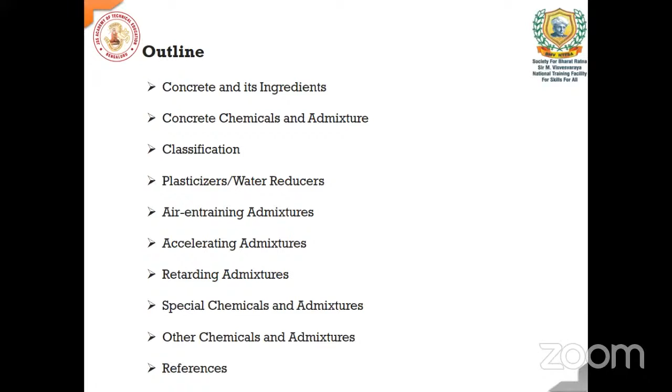Today I'll be giving a lecture on the role of concrete chemicals and admixtures in construction. This is the outline of my presentation. We'll be discussing concrete and its ingredients, concrete chemicals, admixtures, classification of the chemicals and admixtures used in concrete, plasticizers or water reducers, air entraining admixtures, accelerating admixtures, retarders, special chemicals and admixtures, and other chemicals. Because the family of chemicals used in concrete is very vast, I'll be touching only the important ones which we use very frequently in construction: plasticizers, air entraining agents, accelerators, retarders, and some special chemicals as well as other chemicals. And ultimately, my references.

We all know that concrete is the most consumed material next to water throughout the world.

We are consuming some millions of cubic meters of concrete every year, and it is because of its easiness in preparation and construction. Day to day, its consumption is increasing. We know that it's a composite material consisting of cement, aggregates, both fine and coarse aggregate, water, and we need to add admixtures whenever we want some specific performances.

Late in the 1960s and 1970s, we started using fibers in the concrete. The fibers itself is a very big domain. We have different types of fiber for different applications, and also to achieve a very dense structure of the concrete, we are using supplementary cementitious materials. We also call them mineral admixtures: fly ash, GGBS, silica fume, microsilica, lime powder, metakaolin, diatomaceous earth. There is a variety of supplementary cementitious materials used in concrete.

To understand in a very simple way, concrete is a composite material in which, in general, 10% of the volume is occupied by cement, 20% air and water, 30% sand or fine aggregate, and 40% gravel or coarse aggregate. This is the generalized composition of concrete.

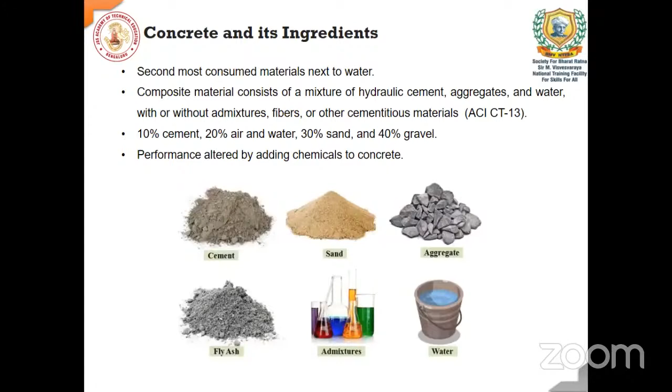Now chemicals have become an integral part of concrete. Earlier, it was an optional part. Now it has become an integral part of the concrete. The expectation from concrete is increasing day by day. So the next one is: what are concrete chemicals and admixtures?

ACI 212.3 clearly defines chemicals or admixtures as materials other than water, aggregate, cement, and fiber reinforcement used as an ingredient of concrete or mortar and added to the batch immediately before or during its mixing. Now we have two different terms, additives as well as admixtures.

The word additive refers to whatever chemicals or ingredients we add during the production of cement in the cement factory. It can be calcium sulfate to avoid the fast setting. Even nowadays, to produce PSC or PPC, Portland Pozzolana cement or Portland slag cement, we add GGBS or fly ash during the clinker grinding. Those are called additives.

If I want to call a particular substance an admixture, it has to be added to the concrete during its production, before or during the mixing. Most contemporary admixtures or chemicals are available in liquid form. When we started using admixtures, they were in powder form. Slowly, because of convenience, we shifted from powder to liquid form. Now it is completely liquid and all are water soluble, synchronized with the water for better performance.

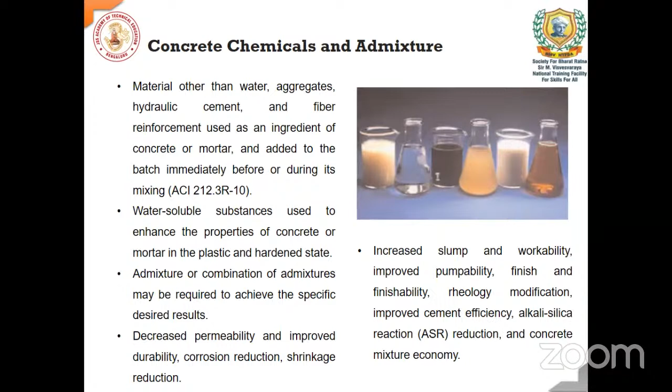See, these are all the different performance or expectations from the concrete. To achieve this performance or the expectation, we'll be using more than one admixture in contemporary concrete production. Now, before going for the discussion on the concrete, we should know the classifications as per the different codes. What are the different chemical admixtures or the chemicals available to be used in the concrete?

So as per ACI 212.3R, it has classified from type A to type G. ACI is well advanced; it accepts the field data very quickly. As far as IS is concerned, ACI will accept the field data, the field feedback, very quickly. So you can see here type A is simply water reducing admixture, B is retarding, C accelerating. Now they start mixing two or more admixtures together. From D to G, it is water reducing plus retarding, water reducing plus accelerating.

There is no conflict of the performance. Water reducing itself is a different requirement. Acceleration is a different requirement. So wherever we don't have such complications or conflict, we can continue to mix the two admixtures. Then F is water reducing and HRWR, we are calling it the high range water reducers. Then type G is water reducing, also high range, and retarding. High range means it will reduce the water content by 30 to 40%. This is the classification as far as ACI is concerned.

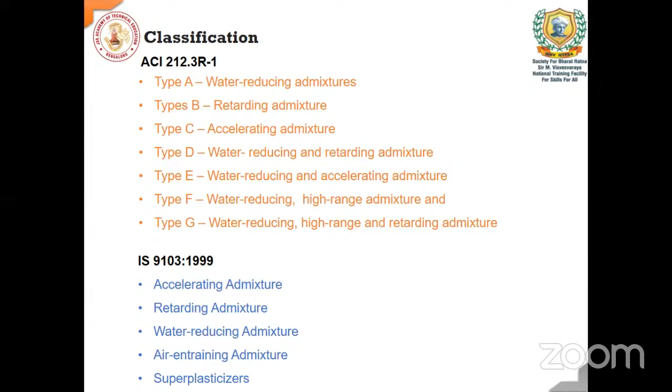Then we have our own IS 9103. They have a very simple classification: accelerating admixtures, retarders, water reducers, air entraining admixtures, super plasticizers. Very important, we have one more standard, Portland Cement Association, that is PCA EB001. This has covered almost all types of admixtures available in the industry. It starts from air entraining agents to damp proofing, bonding, gas forming, anti-washout. It includes all the different types of chemicals which are used in the concrete

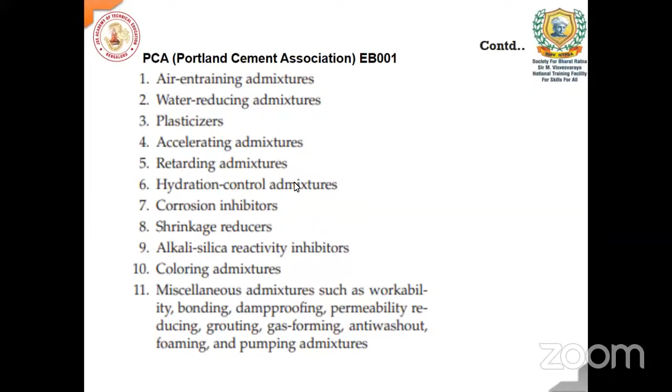throughout the world. So we can see here corrosion inhibitors are also added, shrinkage reducers are also added, hydration control admixtures are also added. We should not confuse the retarding admixture and the hydration control; both have different functions. This is as per again PCA EB001. It has the type of the admixture, what is the desired effect, and what chemicals are used. So, for example, coloring admixtures, we need to provide the color. It's carbon black, iron oxide.

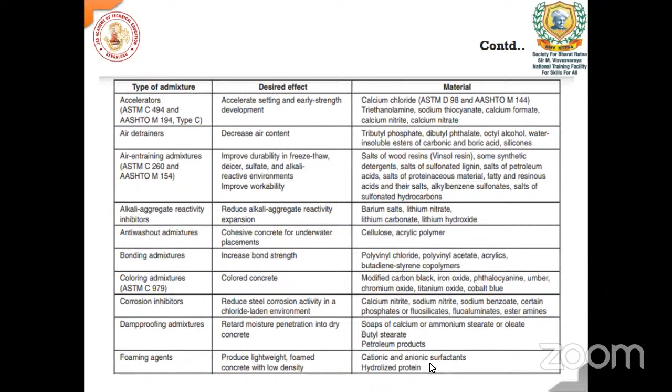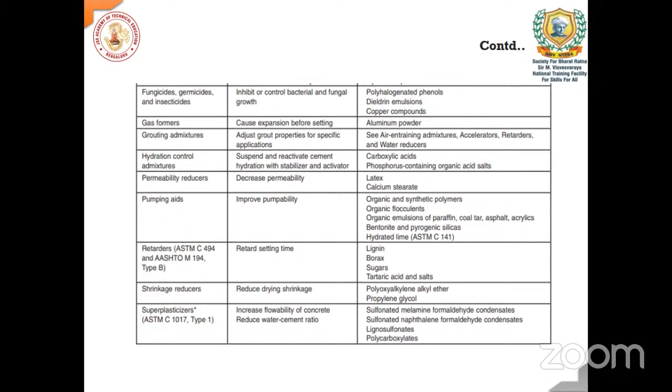Then we have pumping aids, again chemicals. Like this, for a different expectation or a different requirement, we are using different chemicals or admixtures. This is clearly included in the PCA, Portland Cement Association EB001 standard. Again, we have super plasticizer.

Yes, sir. I request all the participants to mute. Actually, somebody has... Sanath, don't admit. They can use the YouTube. No, sir. By mistake, it was opened. I think it has closed now. Oh. So shall I continue, sir? Yes, sir. Okay, please go ahead. Please go ahead. Okay, sir.

Again, we have the water reducer itself. Water reducer and plasticizer are almost the same. We have different varieties of water reducers. It all depends on how much water we want to be reduced in the concrete. We are calling it the free water. For example, per cubic meter, if you are adding 160 kg of water, how much do I need to curtail? Because we know that less water means more strength. So that is why super plasticizers or plasticizers play a very big role in achieving the required strength. These are the classifications based on the amount of reduction.

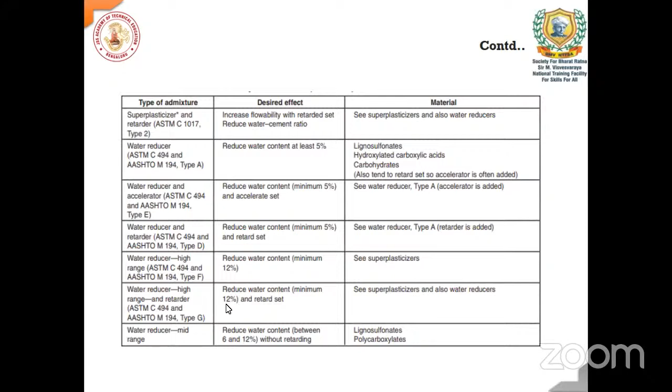For example, we are having water reducers and accelerators. So we can see here there is an improvement up to 12%. That was very old. Now we are in the stage wherein we can easily achieve up to 30% reduction in the free water. Next, I will go in detail about how the plasticizers or water reducers influence concrete performance, both in the fresh as well as the hardened state.

The plasticizers, again, we are going to categorize based on their influence on water reduction. For example, a normal water reducer is somewhere between 5 to 8% free water reduction. If I say high range, now we can easily go up to 30% reduction. Now, how exactly are these water reducers chemically playing their role in the concrete?

We know that cement or whatever supplementary cementitious material we are using is very fine, with particle size at the level of microns. So as soon as we mix the water with the cementitious material, it will flocculate, meaning the particles attach to each other. Because water is negatively charged and cement particles are positively charged, they attract each other. So the water will be arrested or entrapped between the cement particles.

Now by adding water reducers, whether normal, mid-range or high range, the main function is to impart a charge to the cement particles so that they repel each other. Because of this repulsion, the entrapped water between the cement particles will be released. Say we have added 160 or 165 kg of water per cubic meter, and assume 10 liters of water is entrapped between the cement particles. By adding water reducers, we get that 10 kg of water for hydration.

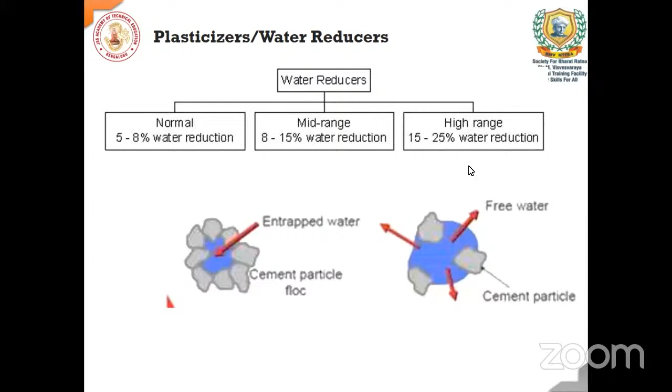Next, what are the different materials used as water reducers? It can be as basic as lignosulfonic acid, the mid one is hydroxylated carboxylic acid, and the current superplasticizer we are using is polycarboxylate ether. Whenever we discuss superplasticizer, it should contain polycarboxylate ether. These are some other chemicals which can be used as water reducers, such as sugar acid. These are organic compounds which reduce the requirement of water.

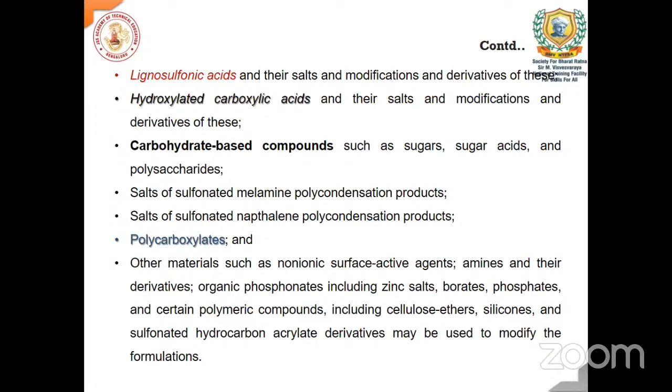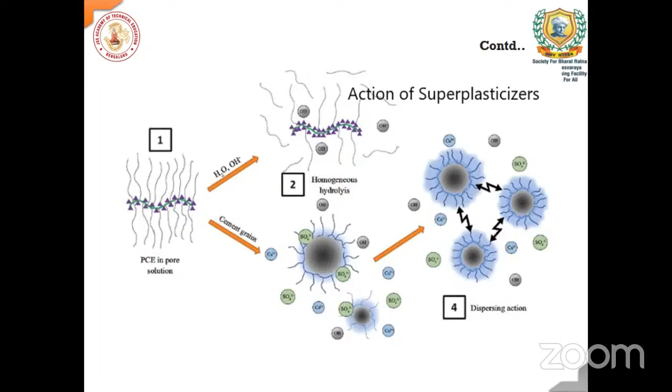In the action of superplasticizer, the plasticizer will release the entrapped water, but the superplasticizer, to one more extent, will repel the cement particles, so that across the entire concrete matrix the cement particles are readily available throughout the concrete. They are dispersed. Once the cement particles are available, we can assure maximum or 100% hydration. Plasticizers just release the water. Superplasticizers, in addition to releasing the water, disperse the cement particles.

Next, what is the effect of plasticizer in general? To some extent, it will also entrain some air in the concrete. It will reduce the water content; this is the basic expectation of the plasticizer. It improves the finishing characteristics and strength. Because of the reduction in water content, the strength will increase. Shrinkage and creep, both plastic shrinkage and drying shrinkage, which are ultimately due to volumetric changes, will reduce. But we can't always expect positive effects of the plasticizer. Sometimes we also have negative effects.

So as all the waters are released because of the repulsive action of the water as well as the cement particles, we may witness bleeding. Bleeding means the water may come out from the other material. So we may expect some enhancement in the bleeding, and also because of the usage of the water reducers, we may also witness quick loss.

So we expect the workability should last for 30 minutes or 45 minutes. We may lose the workability a little early. These are all the other effects of the super plasticizers or the plasticizers.

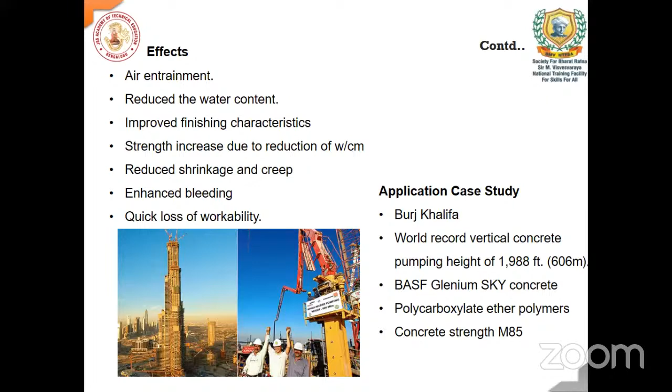Nowadays, whenever we want more retention of the concrete, and whenever we are going for high strength concrete, more than M50, the usage of the super plasticizer is inevitable. And whenever we are using supplementary cementitious material like ultra fine GGBS or silica fume, there must be a super plasticizer, which will ensure the availability of the supplementary cementitious material as well as the cement throughout the concrete matrix. Because ultimately we need to achieve the strength of the concrete, and in the meantime, it should be pumpable, or it should have a very good slump retention.

The next very important one is air entraining admixtures or air entraining agents. We have some peculiar problems like freezing and thawing. Freezing and thawing is a very peculiar problem we may not experience, but it happens in the polar countries.

Sir, give me 1 minute. I'll be back in 1 minute. 1 minute only.

Yeah, in the previous slide, Dr. Shasikumar explained with respect to Burj Khalifa. I'm very happy to share that one of my BE classmates, Dr. Rajendra Prasad, was the quality control in charge of Burj Khalifa, and he was there till completion of the project. And now he has shifted to Saudi Arabia.

Yesterday in the Times of India paper, many of you have seen the structure taller than Burj Khalifa. It is coming up; almost 1/3 or 2/3 of the work is over in Saudi Arabia. The Kingdom Tower in Jeddah. He was my classmate, he is from Tumkur. That is because a lot of infrastructure works are going on with a lot of these admixtures. Now I request Shasikumar to take over.

No issue. As the professor mentioned, the structure is the Kingdom Tower. It's in Saudi Arabia, the place is Jeddah, and the height of the building is 1.1 kilometer. The Burj Khalifa was 828 meters. Now the Kingdom Tower is 1.1 kilometer. It is not yet completed; once it is completed it will overtake the Burj Khalifa. In such projects, usage of the super plasticizer or construction chemicals is inevitable.

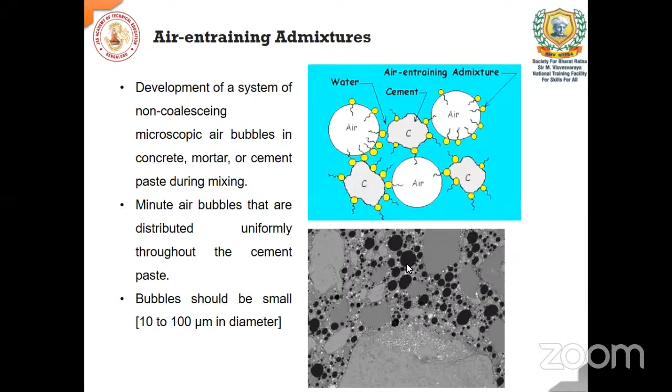Their size is around 10 to 100 micrometers in diameter. We can see here a scanning electron microscope figure. The black indicates the air entrained artificially because of the admixture. The agents are salts of wood resins, detergents, petroleum acids, fatty acids. These are some of the organic or sulfonated hydrocarbons. These are able to introduce a lot of air bubbles into the concrete.

The main objective of using the air entraining agent is to check the freezing and thawing effect on the concrete. This is very much prevalent in polar countries. The effect is increased resistance to freezing and thawing. How is it increasing resistance? The channel for water entry is discontinuous. It is not continuous.

Then improved workability. This is one of the best effects of air entraining agents. In addition to evenly distributing the air voids throughout the concrete matrix, it also acts like a ball bearing for the aggregates as well as the cement particles, meaning they can easily slide. That is why it has the effect of improved workability. Once the aggregate is easily flowing, there will be no segregation, no bleeding. It is very much used in shotcrete pumping. This is very much required.

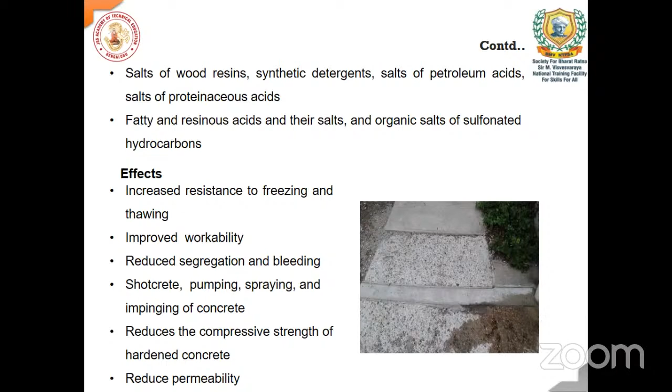Sometimes the compressive strength may reduce because of the introduction of the air voids or air bubbles. Also, as the air voids are discontinuous, we may expect reduced permeability.

The next one is accelerating admixture. Its usage is very much evident in polar countries where the temperature is around 0 or 3 degrees, -4. So we want to accelerate the cement hydration. Using an accelerator leads to an increase in the rate of hydration and a shortening of the setting time. As per the American Concrete Institute, it also leads to an increase in strength.

It is not used only in the polar countries. Wherever we want early removal of the formwork, or wherever we want multiple usage of the formwork in the precast industry, there also we are using the accelerators.

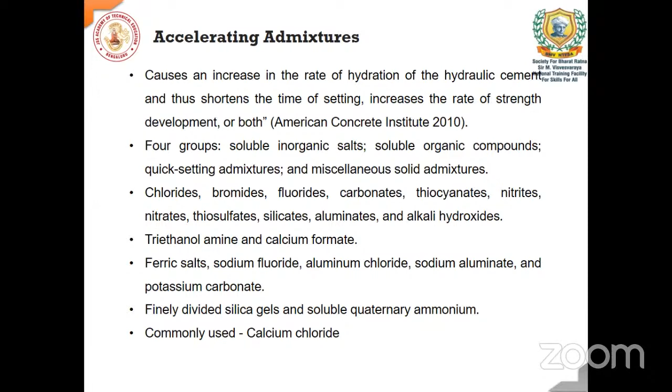The effect of the accelerators is reduced initial and final setting time, such that we can finish the concrete very quickly in the polar countries, or we can reuse the formwork. The formwork stripping time will get reduced. The compressive strength will increase in the early ages.

Whenever we have bridge deck beams or bridge retaining walls, where we need to allow the traffic very quickly, there also we will be using the accelerator. Because of the usage of the accelerator, we will also witness some unwanted effects, like increase in volumetric changes in the form of shrinkage, and because we are using a chloride accelerator, calcium chloride or any other chloride,

in the presence of water, and the hydration process byproduct includes water to some extent, if you already have chloride inside the concrete, it will lead to the formation of hydrochloric acid. The concrete strength completely depends on its pH. If the pH is near 14, if the concrete body is completely alkaline, then it has much better protection against chemical or any other attack.

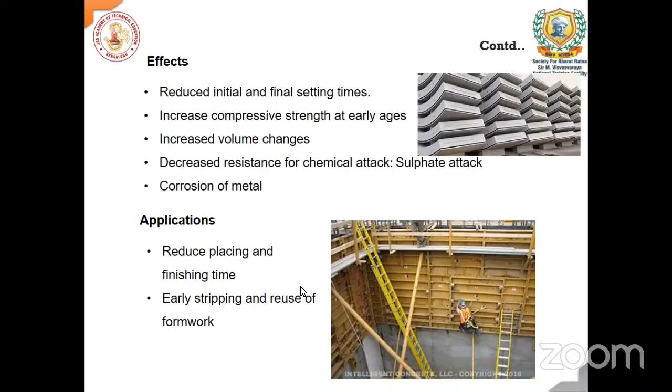The applications: reduced placing and finishing time of the concrete, and early stripping in the precast industry. There also we are using the accelerators. Next one is retarding admixtures.

It is exactly opposite. Whenever we are doing concrete construction under high temperature, 40°, somewhere in Rajasthan about to touch 50°, because of the ambient temperature, the cement may hydrate very fast, and it may gain strength very early. We need to have some time to work with the concrete. We have to mix, we have to transport, we have to place, then it has to start setting.

We require minimum 30 to 45 minutes for a concrete to be produced, then placed. If you don't have that much time because of the ambient temperature, it may lead to reduced performance of the concrete. So for that, we need to use retarders in tropical countries where the temperature is very high. The purpose is to delay the setting of the concrete.

Too much delay will alter the early strength gain of the concrete. We have to balance. Even in the grouting of the retaining wall or any other structure, there also we are using retarders. And nowadays we have paver finish, even for CC roads. Till the paver finish is complete, the top surface of the concrete should be workable.

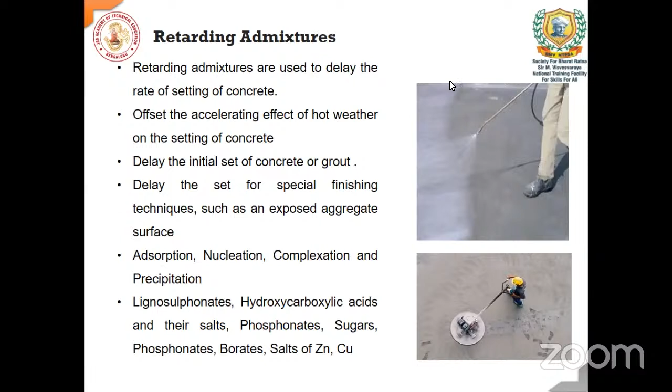See again, what are the different chemicals: lignosulfonate, hydroxycarboxylic acid, phosphonates, sugars, and borates. These are the different chemicals used as retarding admixtures. Then effects: care must be taken, otherwise we'll end up with reduced compressive strength. Then it may increase the initial slump.

See, the main objective is to keep the concrete workable for a longer duration. Because of this, the initial slump may be high. When the water is not used in the hydration process and the free water is still available, it may lead to bleeding of the concrete. These are all the unwanted effects of retarders. That is why care must be taken.

In all the admixtures, a thorough trial mix should be done to tune up the dosage of any type of admixture. Whenever we change the material, the aggregate, or the cement type, we have to conduct the trial mix. The compatibility between the cement and admixture is very complex. We need to achieve that first. Then we have to check the compatibility with the other ingredients of the concrete. That is why the trial mix is the very best way to identify the required dosage of any admixture.

Also, it may delay the rise of peak temperature due to hydration. Plastic shrinkage may slightly increase. When the hydration has not started and the concrete is still in the wet condition for a longer duration, the concrete surface may witness some plastic shrinkage.

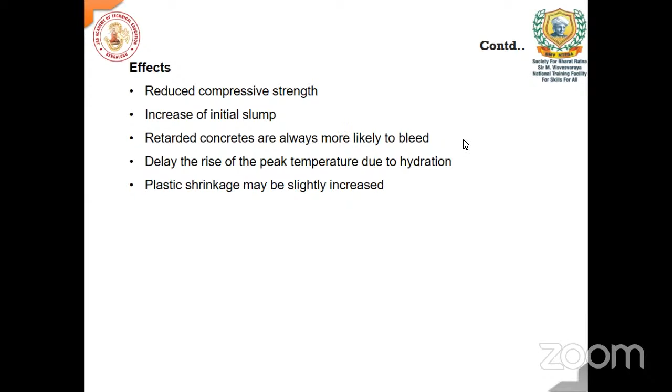Next, we started with the superplasticizers, air entraining agents, accelerators, as well as retarders. These are the most commonly used admixtures. They may be used as a single admixture or a combination of admixtures. Nowadays, as the requirements and expectations from concrete increase, we have some special chemical admixtures. One such is the lithium and silicate based densifier.

Whenever we are constructing any factory building or office building, these buildings have more movement. In the factory, we have movement of vehicles, and in the office, movement of people will be very high. If you want to keep the concrete floor as it is, without tiles or granite, once we do all the placing, vibration and everything,

after hydration, being a lighter material, the calcium hydroxide, which is the byproduct of hydration, will come to the surface. Because of movement and abrasion, it will come out of the concrete, and the surface will become dusty. To avoid all these things and keep the surface as it is, we use the densifier. I want to show one video. One minute.

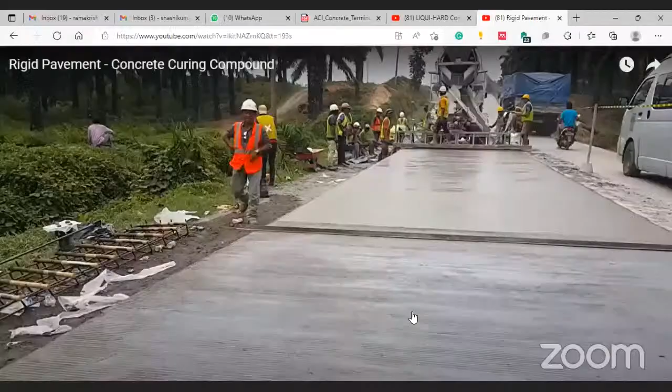One minute. Sir, Sanat sir, is the video visible? Yes, sir. I think the video is muted. Just the audio is muted.

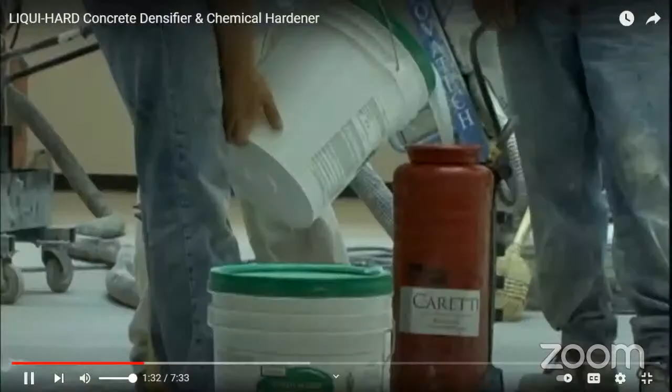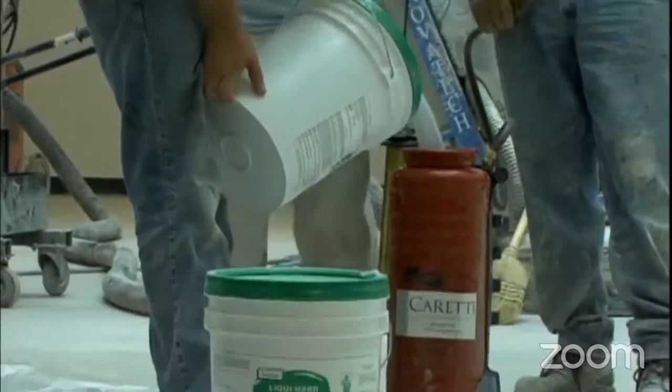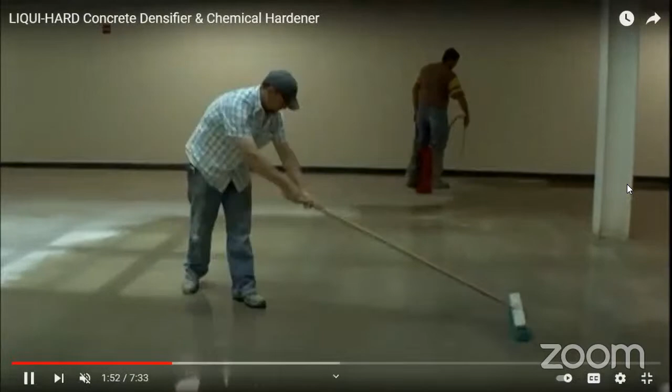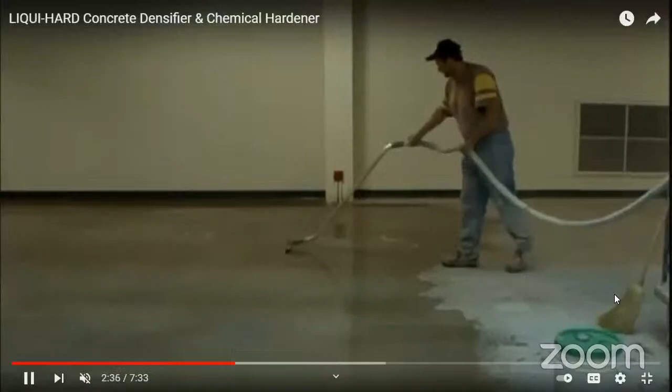The densifier can be lithium or silicate based. First, they grind the surface so any loose material or dust comes out. Thereafter, they spray the densifier. Then they again do the grinding so that the densifier penetrates into the top few millimeters. We can see it's like a mirror, like a granite material. So this is the application.

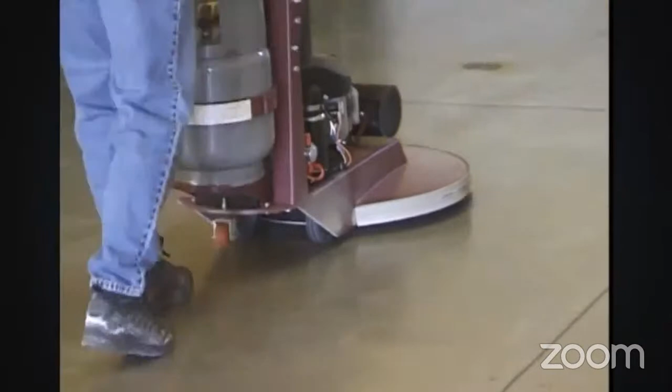Yeah, this is the grinding process. See, if you want more luster, or if you want more shining, you need to grind. I hope you remember in earlier days, this was used for the mosaic tiles. Similarly, they will go to do. But ultimately, it will impart a very good hard surface.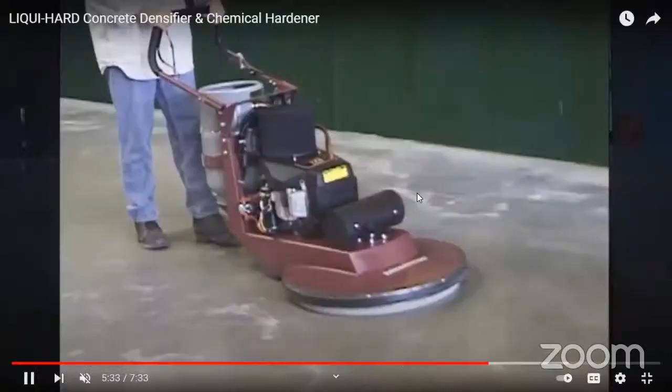See, these are the different companies. Yeah. Yeah, we'll go back to our presentation.

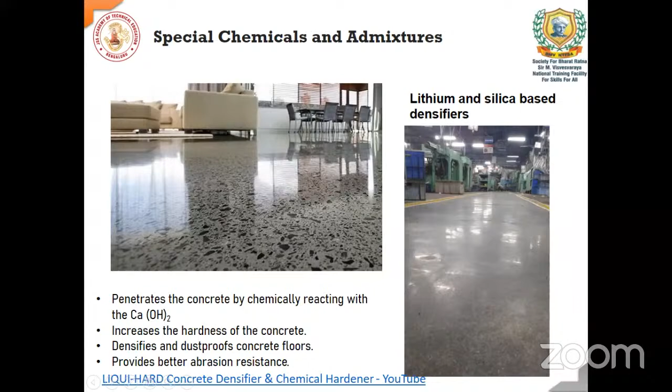So next one is the special. So whenever, it depends. See, if our concrete element thickness is very less and its exposed area is very high, walls, or ensuring to use the road very quickly, then application of the self-curing compound is inevitable. Glycol ether. See, here it will prevent.

See, as I told in the beginning, whatever the water content we add or whatever the water cement ratio we have added, it is just sufficient for the hydration of all cement particles. See, the main purpose of curing, it can be any type of curing, is just to ensure that whatever free water added during the concrete mixing should not escape in the form of evaporation.

So now with that objective, instead of going for pond curing or gunny bag curing, in road construction or retaining wall construction, they are spraying the self-curing compound, which will provide a layer wherein whatever water added to the concrete is not going to escape in the form of evaporation. See, again, one more video is there. I'll show that.

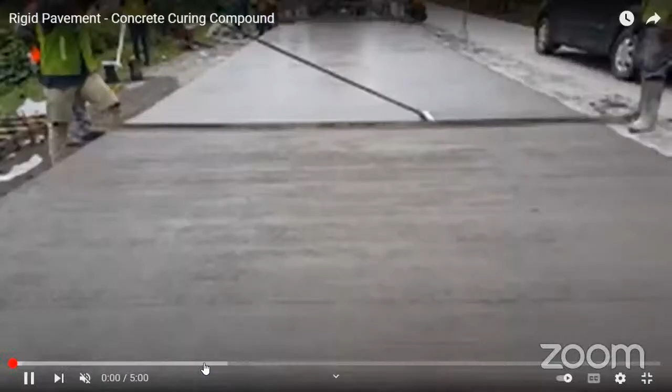One minute. It's open, but it's blocking. So, Sana sir, how to push this bar up? Because I can't see the tabs. Sir, can you guide me? Minimize, sir. You can go for share. Rigid pavement. No problem. Sir, it is the next tab. Now the screen is visible, sir. Yeah, now we are able to see.

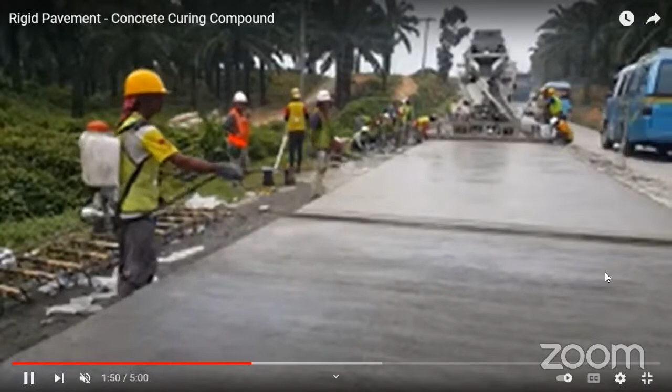See, this is the road construction wherein the labor is spraying the self-curing compound. See, when we apply the self-curing compound, there is no necessity of gunny bag curing or pond curing. This self-curing compound provides a protective layer; it won't allow the moisture to escape, and it does not have any side effect, or it won't change the surface hardness. No such side effects.

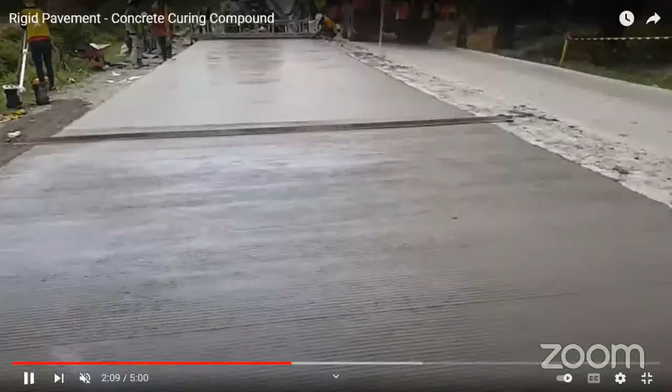Yeah. So this is the one small video. We'll go back to our presentation. See, this is a very useful chemical. Whenever the ambient temperature is too high, and whenever there is a high chance of early escape of the moisture, usage of the self-curing compound is inevitable.

Now we have the mega construction happening in India, the Delhi to Bombay expressway. There they are completely using the self-curing compound, and it is in the spray. Now they have the target of achieving 2 kilometers per day. So when they have such a big target of 2 kilometers of concrete road per day, then where's the question of curing? It is just spraying the curing compound and moving on.

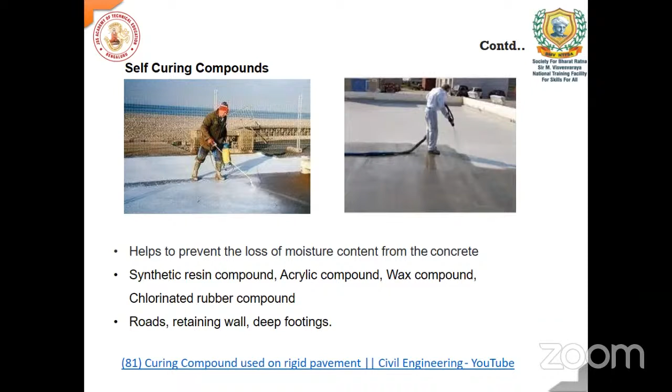See, not only in roads, we have retaining walls, also deep footings. Wherever it is highly difficult to cure the concrete element, we'll go for the spraying of the self-curing compound. And one more agent, foaming agents, which is also a chemical. We also call the concrete produced by using the foaming agent cellular concrete.

It's a very simple concrete wherein we are using cement as well as the fine aggregate, no coarse aggregate. And the density we are keeping at 800 kg per meter cube or less. It is highly porous, it is highly lightweight. Say our regular concrete weighs somewhere around 2,300.

Dr. Shashikumar, some audio issues, some network issues, sir. Hello, Shashi? Yes. Hello. Am I audible, sir? Sir, am I audible? Yeah. Now it is clear. Okay, sir. Okay.

Now we are talking about the foaming agent. Foaming agent is the new age chemical to be used in the concrete. Though we are not using the coarse aggregate, the ingredients include only cement, water, foaming agent, as well as the fine aggregate to some extent. And our main requirement is to produce the concrete having a density less than 800 kg per meter cube. If you compare our regular concrete, which has a density of 2,300 to 2,500 kg per meter cube, it is very less.

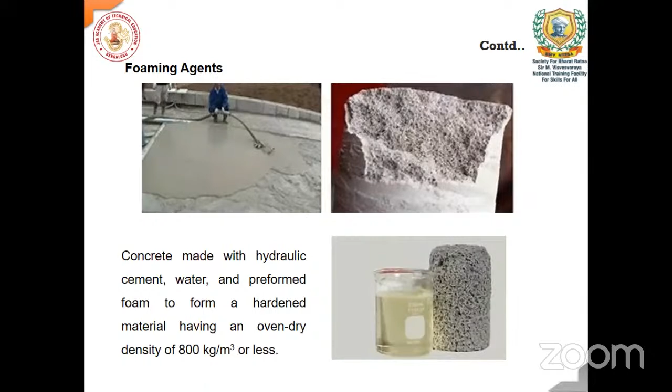Just to add your application, in L&T all the infill walls are this concrete only nowadays. Yes, sir, I have visited a few L&T buildings. For infill structures they are not going with hollow blocks. They are going with only this application for separation. Yes, sir.

And also it will reduce the load on the building to a greater extent. It is 2,300, and where is the 800? It's almost 1,700, 1,800 less. So it's a very great saving in the design. It's a very good example the professor has mentioned.

And in addition to this, we have other chemicals which are used in the concrete. It can be a flowing concrete. Slowly we are moving out of the site mix concrete and going for ready mix concrete. We will just order, they will bring, and they will finish.

For example, just for information, if you are going for site mix concrete with all the equipment, all the ingredients and all the labor, we can achieve 28 meter cube per day. It's a study we did. Per day means 8 hours. Now if you are going for ready mix concrete, 28 meter cube we can achieve in 45 minutes. That is why in the city environment, where we don't have space to store the material and we don't have time, earlier it was a one-day affair, now it is a 45 minute or 1 hour affair.

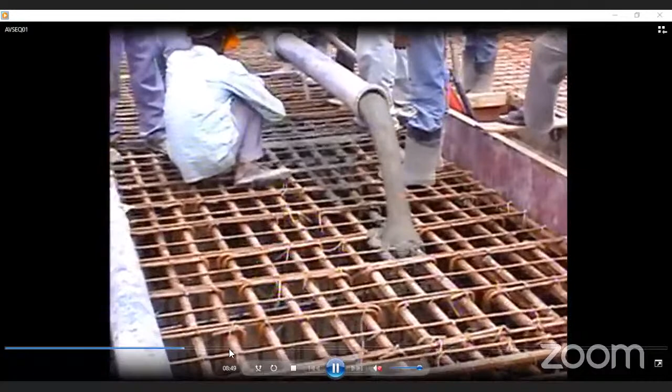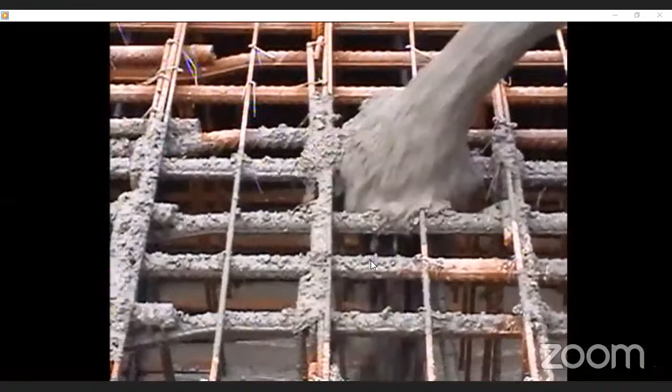You can see the concrete is really flowing like water. And also you can see the congestion of the reinforcement. The concrete is flowing inside the beam. One beam took almost 40 to 50 cubic meters of self-compacting concrete. So you can observe the concrete is flowing like water. It is nothing but SCC, self-compacting concrete.

And the very important thing whenever we are pouring self-compacting concrete is the formwork. As concrete producers, we told the client, BL Kashyap, that the formwork should be waterproof, like a cylinder or a water tank, and also it should sustain the load. Concrete is not sitting for so many minutes; it is flowing. And it should take the load. 1.5 meter by 1.8 meter is not a small dimension.

One minute, I will just move the.

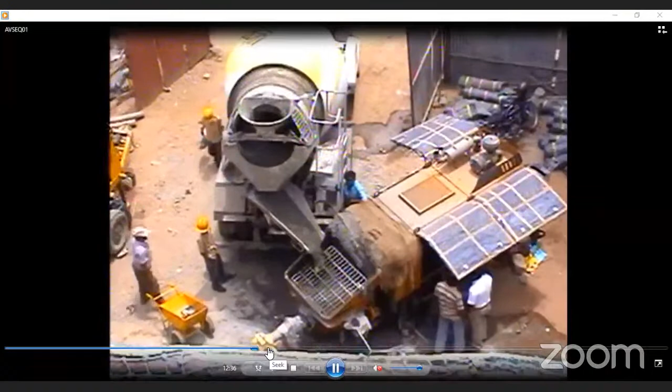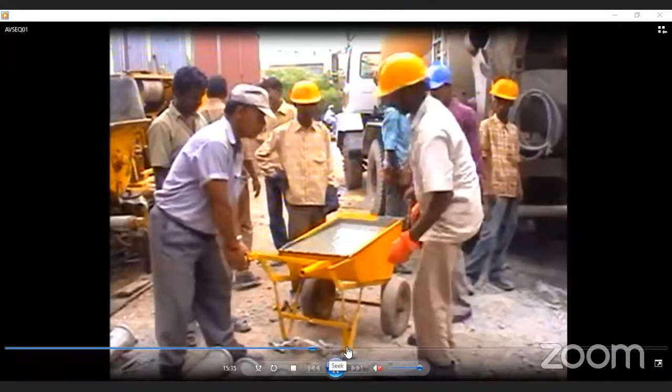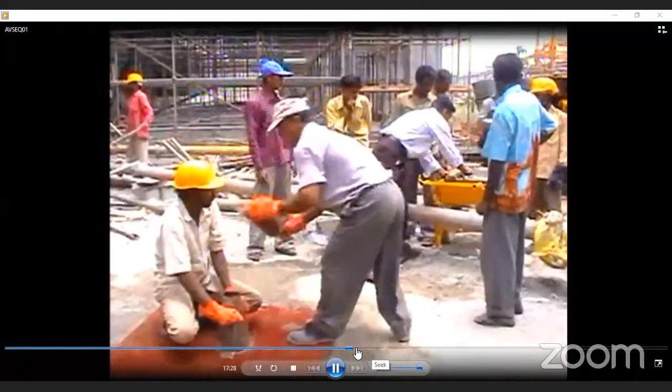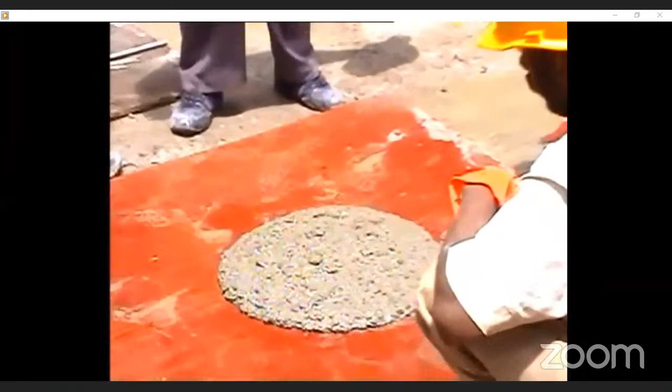We need to do some checking for every batch of the concrete. At that time, the instruments were not so advanced. We used whatever material was available at the site. This is the flow table test. We can observe that the coarse aggregate is not only in the core of that circle; the coarse aggregate has traveled to the periphery of the circle. This is possible only with the usage of air entraining agents as well as the viscosity modifying agent.

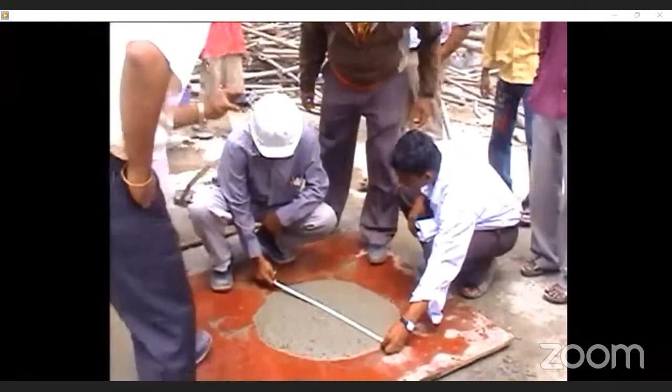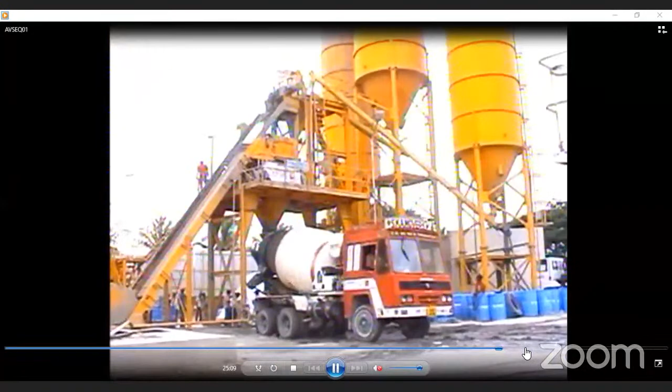We checked not only at the site, we also checked at the plant. We did the V funnel test as well as the flow table again. It's a very sensitive concrete. The mixing time should not be more than 30 seconds. If the mixing time is more than 30 seconds, even though you added air entraining agents, it will lead to the burst of the air bubbles, and the air entraining agent will not have any effect. Care must be taken with the mixing time also.

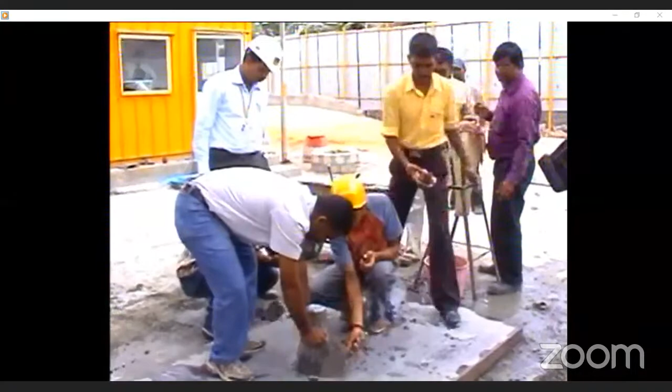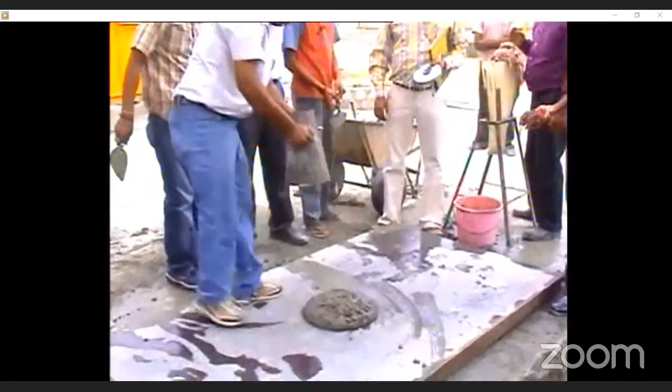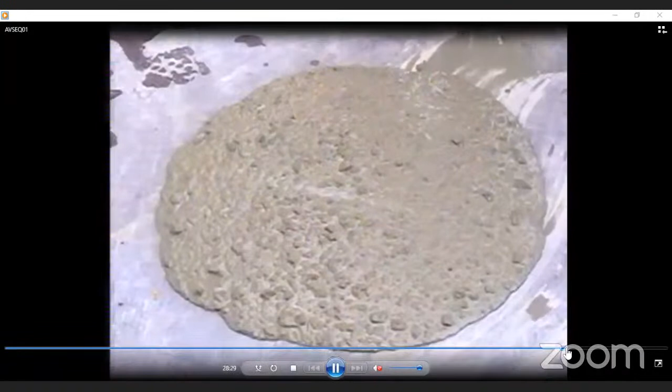This is in the plant also; we checked and we supplied altogether 355 cubic meters over a period of 2.5 days, continuous. This is very important: the flow of the coarse aggregate to the periphery of the circle. It should not stagnate only at the middle. Also, we checked the V funnel. This is the top view. This is the V funnel test.

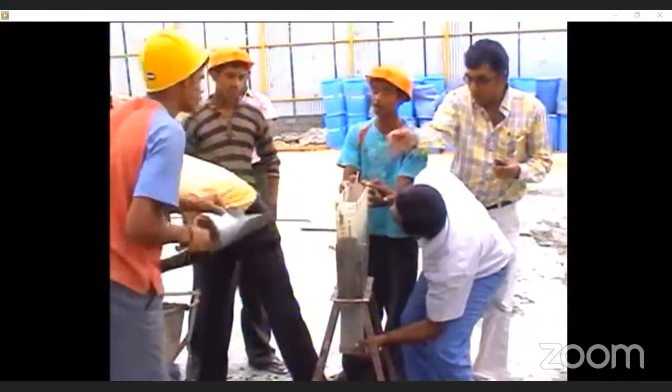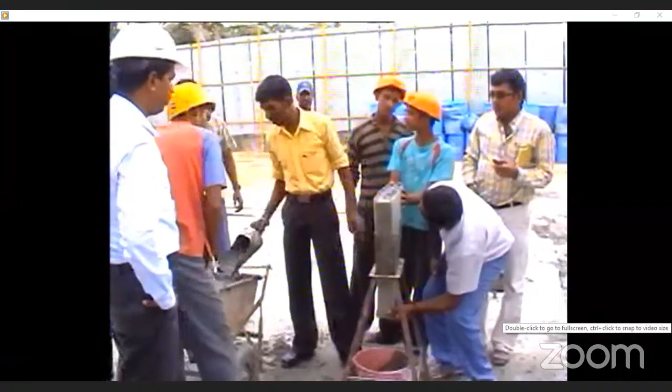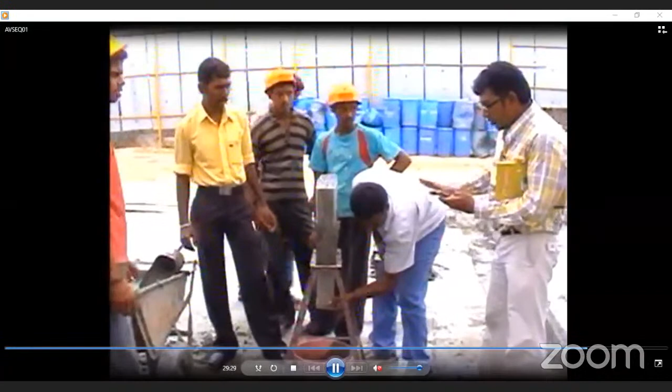This flowable concrete or SCC has different requirements: fillability, flowability. Flowability means it should be able to pass through the reinforcement. Fillability means it should fill each nook and corner of the formwork. Like that, we have different requirements; it is not a single requirement. Now, the entire concrete in the V funnel should have passed within 10 seconds. We achieved somewhere around 8 seconds.

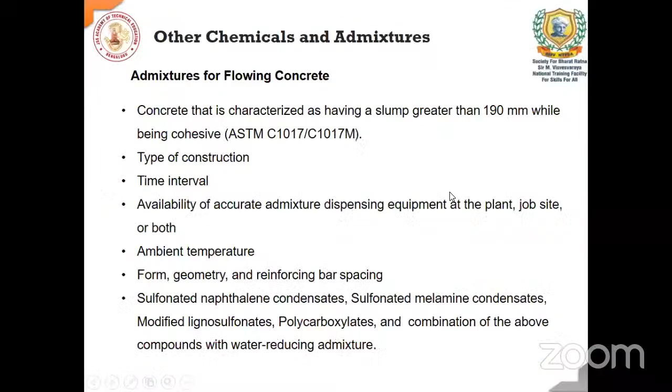So we'll go back to our regular presentation. Apart from the special as well as the other admixtures, we have different chemicals as well as admixtures which are very much required whenever we are going for the repair of the concrete. For example, rubber latex. It can be a natural rubber or an artificial rubber. Nitobond is one such example, marketed by the Fosroc company, which has styrene butadiene rubber latex. We call it SBR latex.

We are using this polymer in the concrete. Rubber latex is a polymer; latex itself is a polymer. Usage of this polymer in the concrete has many advantages. For example, if you take any compound in which you mix water, ultimately it will have some air voids in it. It is inevitable. In concrete, water is a must, and it is inevitable.

Now why is the air void there? With the usage of this rubber latex, what is going to happen? This rubber latex is going to fill those air voids. The air void is not empty or free. If it is empty, foreign free water may come in or foreign chemicals may attack or get into it. But this is filled by the polymer rubber latex. This is one advantage.

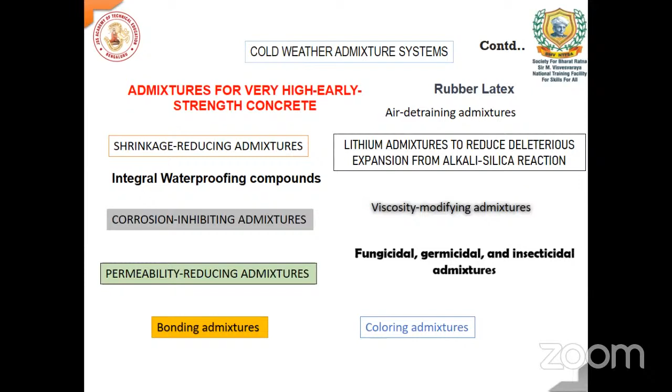If you are going for underwater concreting, we have different chemicals wherein the tremie method was used, and it should set as soon as possible. Whenever we are going for the pile foundation, concrete should set very early so that we can lay the foundation on the piles. Like that, we have n number of admixtures and chemicals available to improve one or many performances of the concrete.

Yes, we are happy. Your presentation is excellent, and also the slide preparation is good. Thank you, sir.

This is the need of the hour for all the construction industry people to take care of. You should not always rely only on conventional concrete. There are various types of concretes. Making good concrete or bad concrete is only in our hands. The concrete ingredients are the same. The making procedure you have to adopt very properly.

I request all the construction Nirmiti Kendra engineers, please download IS 516 also. They have given clearly the procedures and the concrete making techniques. The code books are available. What are the various processes involved? Just by adopting good process technology, you are able to achieve very good concrete. The job of the concrete is to protect the steel. If you are not making a good concrete, your building will not be durable.

See, IS 456-2000, what is the theme? I think we all know that the theme of the code book is durability of structures, because the structures were not durable with the code book of 1978, which I used during my course of time. IS 456-2000 says make a durable concrete. If the concrete is durable, your structure is durable.

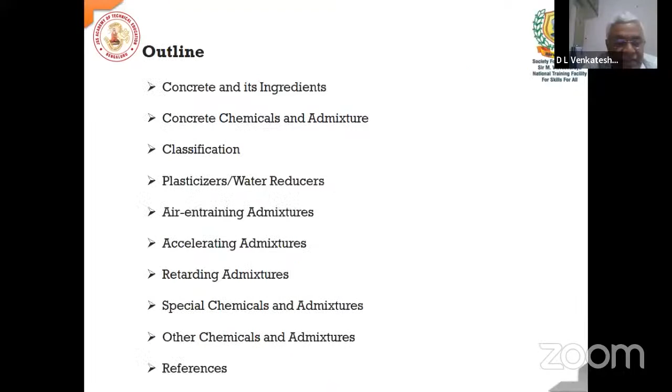The cost of self-curing compound is more than simple curing. How much price variation is in it? Yeah. So obviously, we know that water is the very cheaply and easily available curing aid. But whenever the situation or the site condition is not supporting, there we have to go for the self-curing compound. That is number one.

When it comes to the cost, yes, it is always 10 times costlier than water. If I'm not wrong, it is somewhere around 180 to 200 rupees per liter. And we are not applying it directly; we have to mix it with water for ease in spraying. And yes, as you mentioned, it is obviously costlier than water.

Yeah, actually, it is nothing but membrane curing. The membrane curing technique is a new technology. See, whenever the surface area is very large, we cannot do ponding. And also, as he rightly mentioned during his presentation, the area exposed relative to the volume of concrete is very high, especially in slabs, runways, and airfields.

See, actually, it undergoes plastic shrinkage cracks. Once the cracks are formed, it is very difficult to repair. These cracks will appear before the final setting of the concrete. You can see all this map-like cracking. To overcome this type of cracking, whenever you have to cure a large area, it is advisable to go with membrane curing or spray curing.